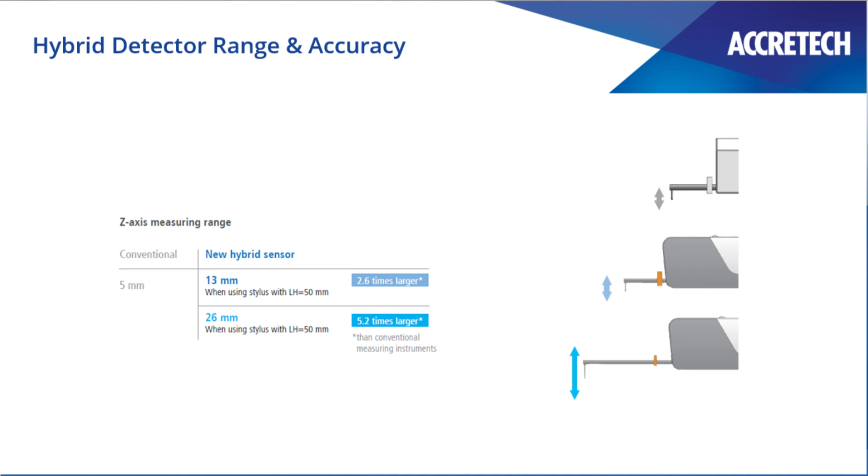By changing to a special contour stylus, it is also possible to further extend the Z-axis measuring range. Only the stylus instead of the entire sensor needs to be replaced. With the stylus with LH 150 mm, so the length of the arm, the measuring range can be extended up to 39 mm. With the stylus with LH 200 mm, so again the measuring arm a little bit longer, the measuring range can be extended up to 52 mm. This corresponds to the values of conventional contour measuring instruments.

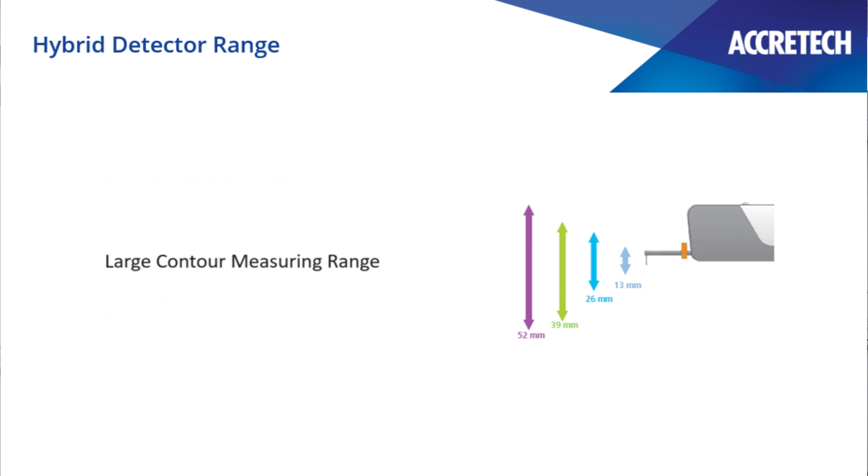So again, the advantage of this would be we can use a standard or double length stylus to measure up to 26 mm contour and surface finish, but then swap for a longer stylus without changing the measuring head to measure contour.

Our hybrid detector also offers high resolution even with a large measuring range. With conventional hybrid and roughness detectors, the measuring range needs to be reduced for a high resolution measurement, e.g. to 0.5 mm or 0.05 mm, even if a measuring range of up to 5 mm is supported. With the Surfcom NEX hybrid detector, there is no need to adjust the measuring range. This sensor offers high resolution in a measuring range of 13 or 26 mm without any adjustment.

This also offers some advantages when calibrating the machine. Obviously, if I'm using two different measuring heads, I'm having to swap the heads and recalibrate them. So I'm calibrating the machine, measuring contour. I'm then having to take the head off and swap it, put the surface finish head on, calibrate the machine, and then measure. If I'm using a machine where I have to just swap the measuring detector, again, I'm possibly going to have to swap the detector, recalibrate, measure again.

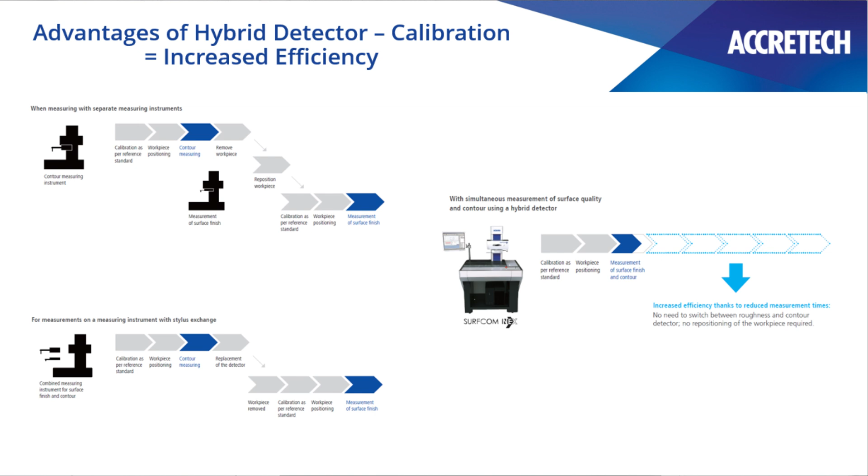The advantage of our hybrid detector is I can calibrate, I can measure surface finish and contour. If I only want to measure contour for the week, so be it. If I don't want to measure surface finish, so be it. Or I can measure both. You won't find that you're spending a lot of time swapping, changing the heads. So in effect, another advantage of the hybrid detector is increased efficiency. Please now see the hybrid detector in action, measuring a couple of components.